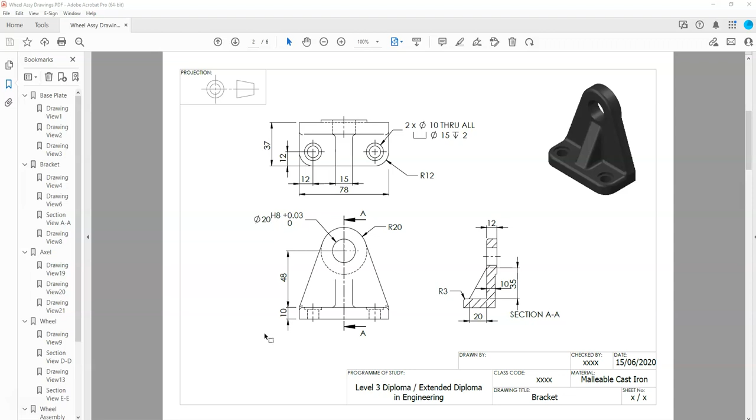Hi, hello. So, going to take a wee look at a few podcasts here to have a look at developing out the actual part models for the wheel assembly you can see on screen here at the moment. Just filtering back through the PDF here. We'll start off modeling up the base plate here, followed by the bracket, followed by the axle, the wheel, and then finally building the assembly.

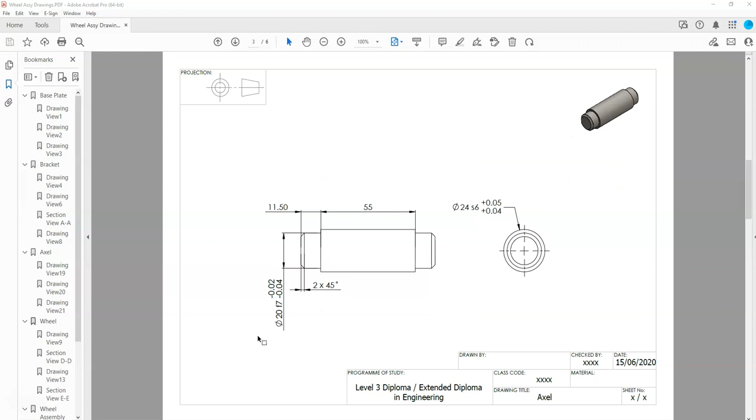Just a reminder to also watch the series of podcasts Producing Engineering Drawings, which will show you how we will then take these part models and actually produce the drawings that you're seeing here on the PDF. Okay, so let's get underway. We're going to start with this. If you're going to do this along, the PDF for this is available on Canvas. You might want to have that on another screen. I'm going to drag this off to my other monitor here now, and we'll make a wee start.

So looking at that component, I'm seeing a little bit of symmetry going on here, and I'm also looking for the best sketch that's going to capture most of the object nice and quickly. So I'm going to select the front plane here, and I'm going to start by popping in a little center line. Just something like so. And then I'll pick up a line here, and let's see, where do I want my origin? Probably down the bottom. So I'm going to come across, starting on here. It's 48 wide, so I'm looking for about half that, just sketching roughly the size. So let's make a wee start.

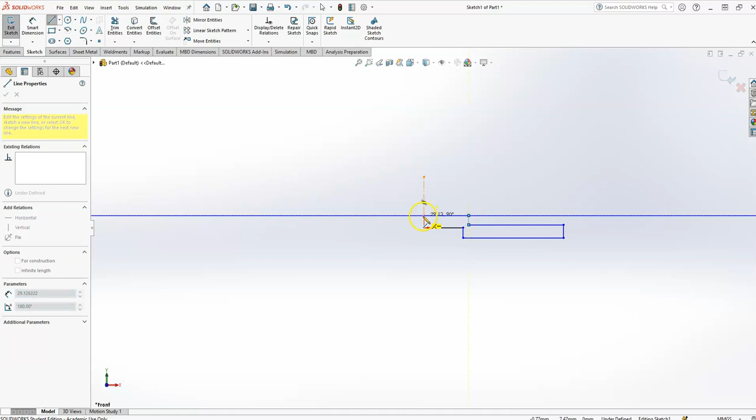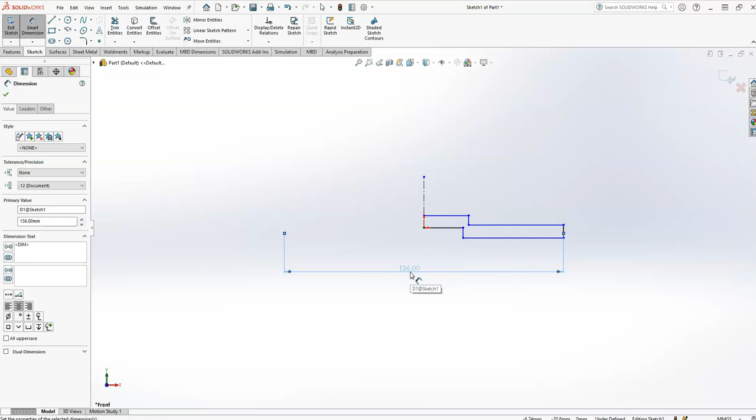So that's coming down a little bit. Coming along, overall length 136, so that looks appropriate. Height up here is about 8 mil, give or take, so we'll do that. Comes across not quite as far before rising up a little bit. I'm back over, making it coincident with the center line. If I pop in a few dimensions here, I think I'll start with the overall length of the object. And you'll notice I'm dimensioning to that center line, which gives me the option to either present the dimension like so, or if I simply push my mouse out to the left here, I can display the overall length, which I think I will prefer, as this can be used when I produce drawings later on to capture the information the way I would want it.

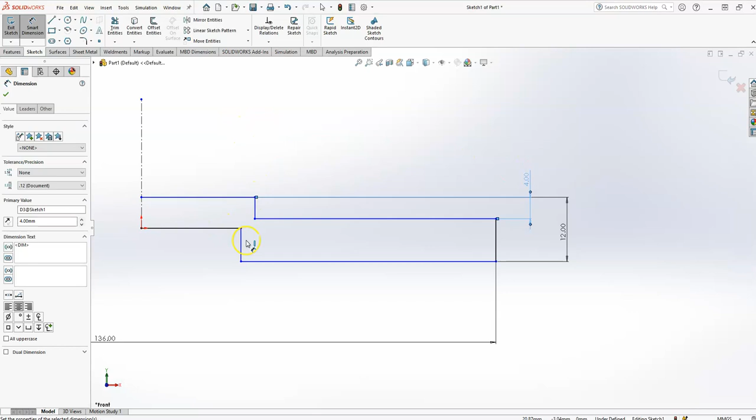Okay, carrying on with the process then, zoom in here a little bit. Actually, no, just going by the PDF, I'm going to go from the bottom line here up to the top. Sorry, something's gone mad here. Let's try it again. Bottom line up to the top, and we'll back off here a little bit because we've got to fit a smaller one in. So that's going to be my height of 12, and then from here to the top of the component, I'll pop that in as 4 mil. And then we have the distance from here to the center line. And again, if I just zoom out, I can push the cursor to the left to get the dimension shown as if we had both halves of this already modeled.

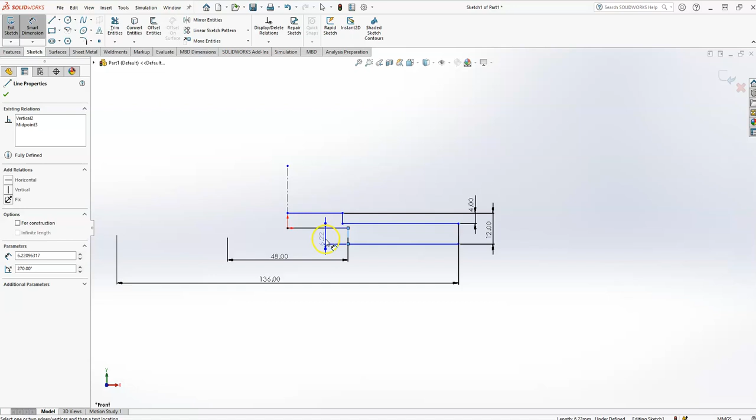Okay, so let's see where we're at. We've got a few dimensions in there. Oh, we need to capture also the height here. So I need to capture, oops, try to avoid the midpoint there. Where might be a good place to pop that? Let's pop it there for a wee second. Pop 4 on. I can always then give myself a little bit of room by dragging these down so I can more easily see these dimensions.

I'm just looking at the style of my dimensioning. It looks like an open arrowhead and so on. So I think I'm going to also go up to options here. Just lets you see how you might change the style the way that you might want the standard to depict. I'm going to go to document properties, and I can see my drafting standard is set to BSI. I'm going to set mine to ANSI. I'm going to say OK. Right, that's a little, I think, better looking on the eye there.

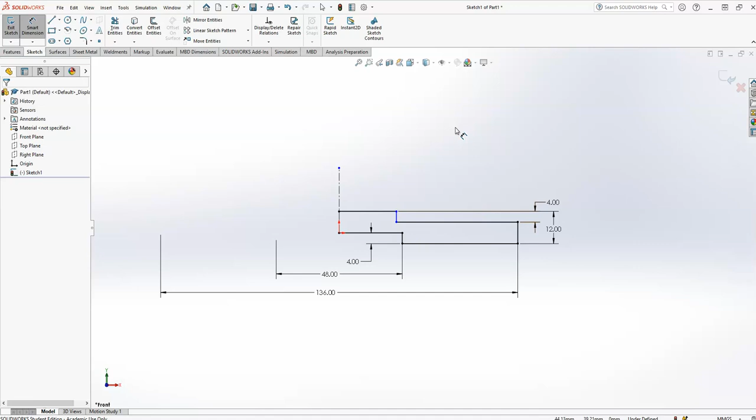Okay, I've still got a line here, and we know the height of that is 4. So, yes, it's the other dimension that's missing, which is from here to the center line, which is giving us 60. I'm going to green tick on that. I think at that point as well, just to deal with that center line, I'm just going to drag it down and make it coincident with the top of the component.

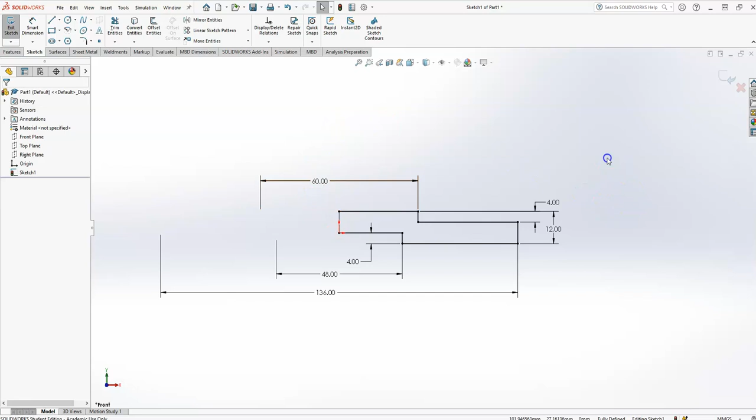So here I have a fully defined sketch, and I've got my center line, which means that I can drag a window over everything, and simply click Mirror Entities, and it will instantly mirror the already fully defined lines to give me a fully defined drawing. Please refrain from mirroring the object until you have fully defined the sketch up to that point.

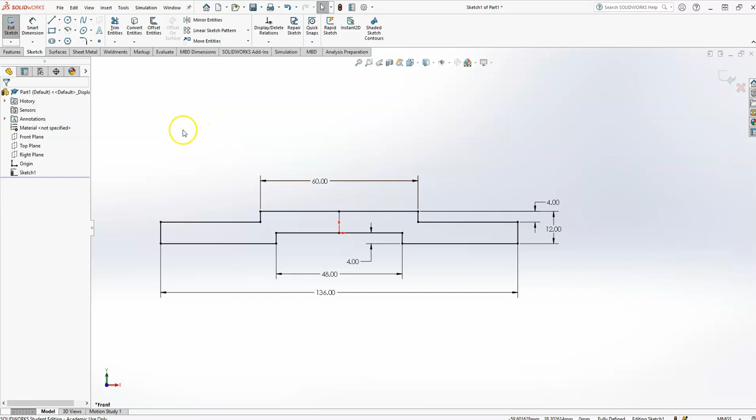Okay. So this is my chosen initial sketch, and you'll see when I go to features here and I extrude this, I'm going to choose a mid-plane extrusion again to keep some symmetry with the object, having 4 holes drilled in each corner, for instance. And I'll do that to 78mm and do the mid-plane extrusion. So you can see by choosing that particular sketch on the front plane there, I've created by far the majority of this actual component very quickly.

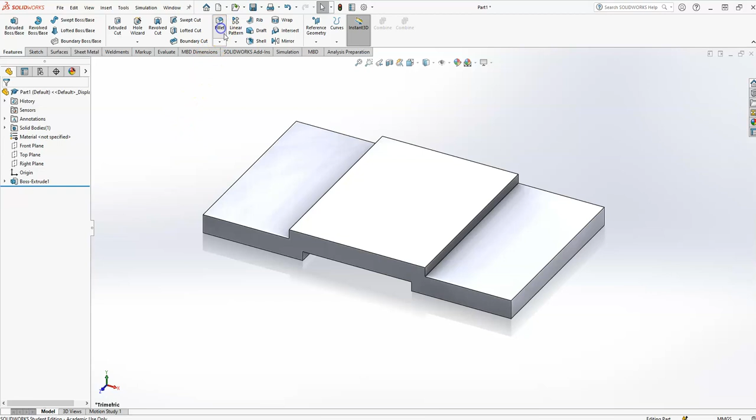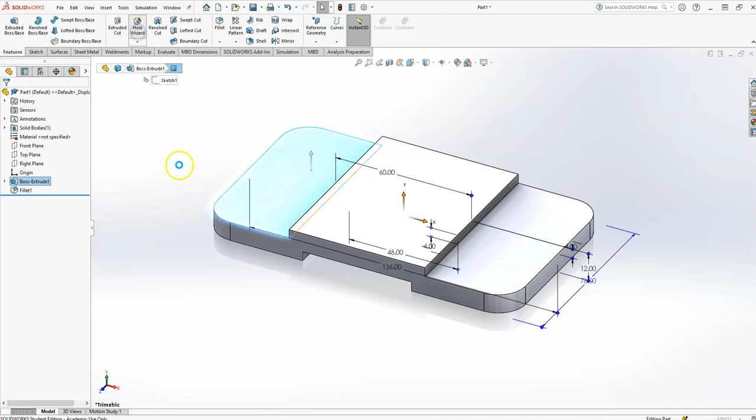I'll then go with the fillet command here, and I want to add a radius 12 fillet on the corners here, and I should be able to see through. There we go. Pick that edge now, and this edge here, and I can add in my fillets like so. I can then select the surface because I want to go to the hole wizard, and it's always important for where we're at to select that surface to begin with. And go for the spacebar.

I'm going to take a plan view on this here, and we want 4 diameter 10 holes that go through all. So that's going to be our hole feature on the wizard. We're working in metric. We need drill sizes, and we're looking for diameter 10. There we go, there it is there. The end condition, the drawing does say through all. If it was halfway through a blind condition, we would change that to blind, and there are other options in there as well. But for us, it's through all.

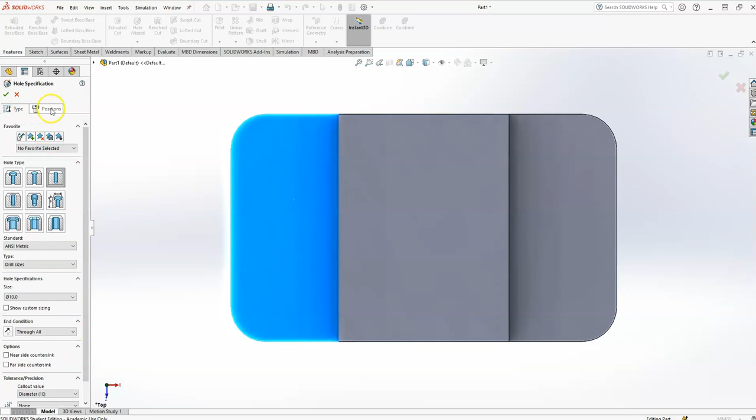There's no indication of a countersink, so sometimes you might find a tick in the box in the near or far side, so just ensure that that's not selected. And that is everything. There's no particular tight tolerances or anything to be applied. So simply, next job, positions. So when we go to Positions tab, the cursor is in the form of a pencil. And as I come onto the object here, you can see it looks like it wants to create that hole.

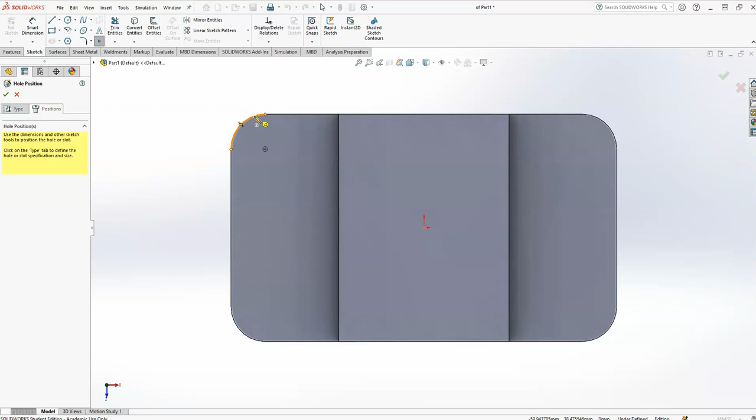So position-wise, from the drawing here, it is concentric with the arcs on the corner. So if I hover over that arc without clicking on it, it'll wake up this center point, and I can click in position. So you can see no center point, but if I hover, there it is, click on it, hover, click on it, hover, click on it. I can now green tick, and I have got my base plate created like so. Let me just quick check here.

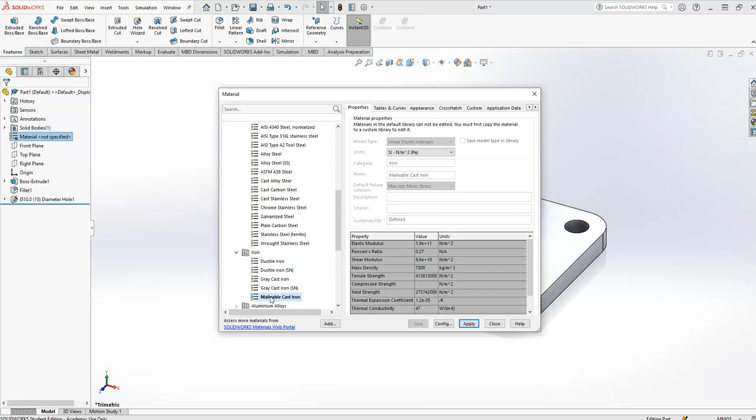Okay, the drawing says it's made from malleable cast iron. So I will come over to my material, I will right click, and then left click edit material. Malleable cast iron. So let's have a look here. What have we got? We've got some materials down here. So plain carbon steel, galvanized steel. Oh, here we go. Here's iron here. There we go. Malleable cast iron. Okay. We'll apply and close.

Material is now applied. And I probably should have done this already, but it's always important to save regularly. Mind you, worst case scenario, I've only been into this a little over 8 minutes, so I'd be 8 minutes work lost. But do try to save your work every 5, 6, 8 minutes, and it'll minimise any problems. Also, when saving, this is part of a project, so really what I want to do here now is establish where I want to put this.

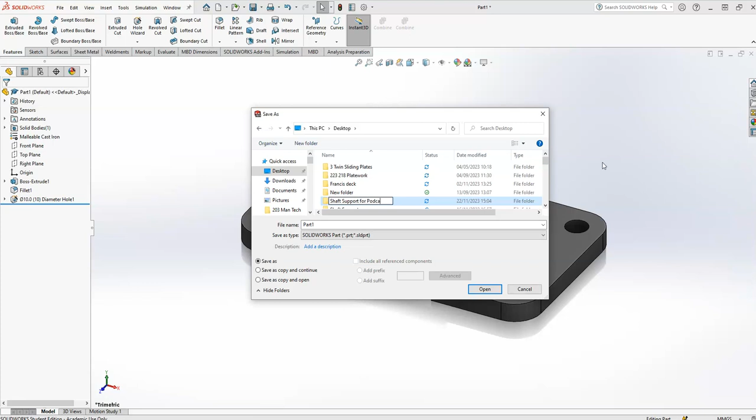So I think I'll pop it onto my desktop as a training one, and I'm going to right click in this area, I'm going to go for new folder, and I'm going to call this my shaft support for podcast. I'm going to create that folder, and then if I double click inside that folder, I can give this part its name, which was base plate. Okay, so we'll go ahead and save that up now.